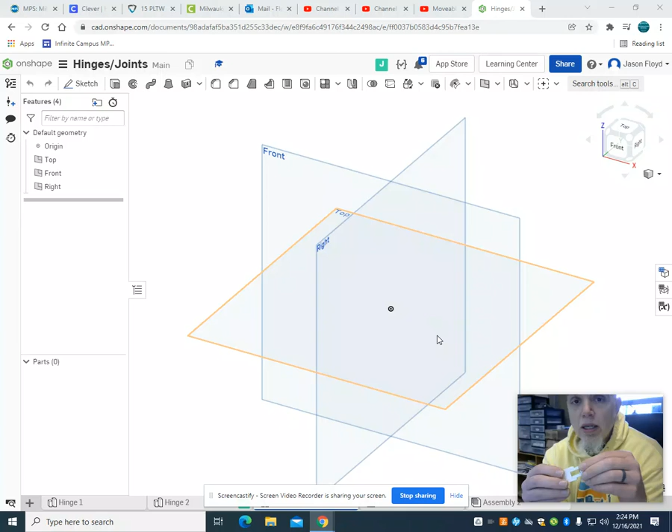In this video, I'm going to show you how to make the second type of hinge. It's a little bit more open, and instead of a bar going across, we have nubs on each side, and we can see how it works right here. Just another option as we're making our movable figure.

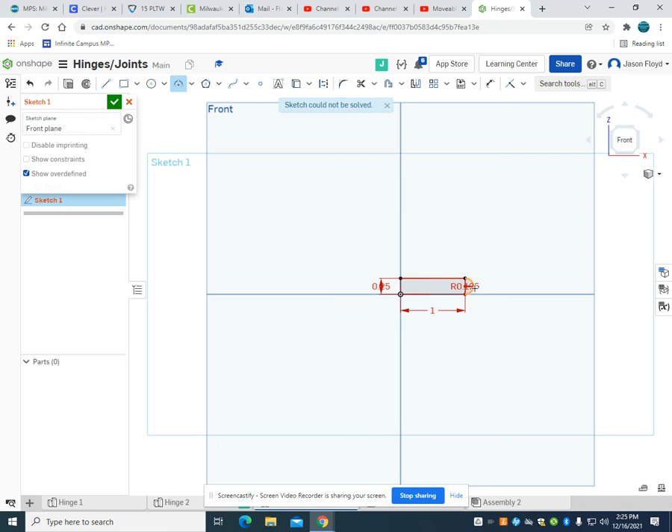We're going to create this same one like we did last time. I'm going to place a sketch along the front here, orientate myself, grab the rectangle tool, and draw a 1 inch by 0.25 inch rectangle. I'm going to grab my arc tool on the end and do a 0.125 inch arc, then extrude this 1 inch.

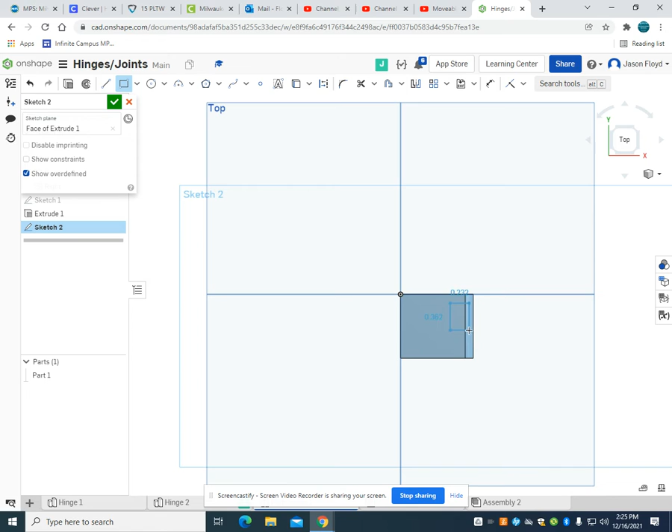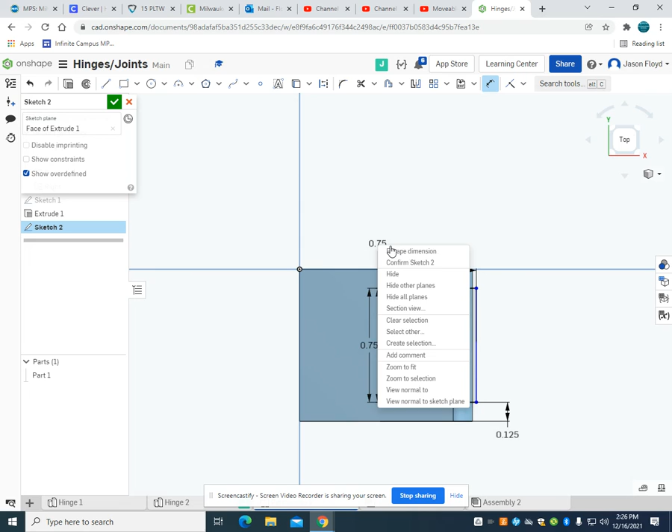Next, I'm going to place a sketch along the top here and orientate myself to the top. I'm going to use my rectangle tool and make that 0.4 by 0.75. I'm going to dimension this from the end here, 0.125, and then dimension it. Let me escape that, and let's redimension that here.

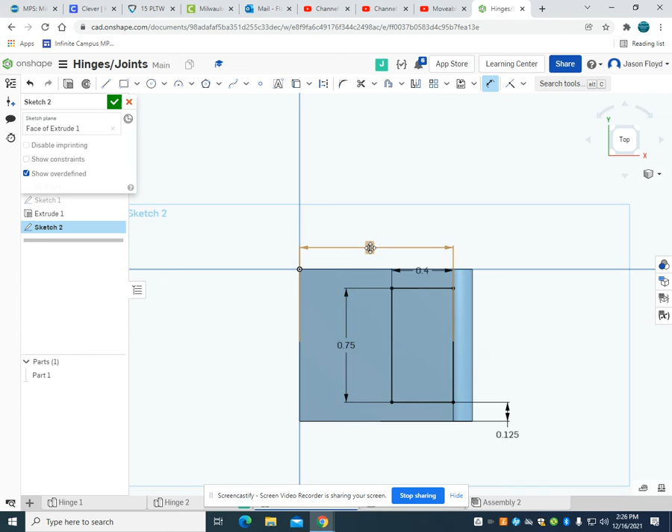Let's do the quick math on that. If that's 1 inch, I think it should be 1 inch. I don't know what I was thinking. No, I lied, it should be 1.125. There we go. I'm going to do an extrusion as a removal.

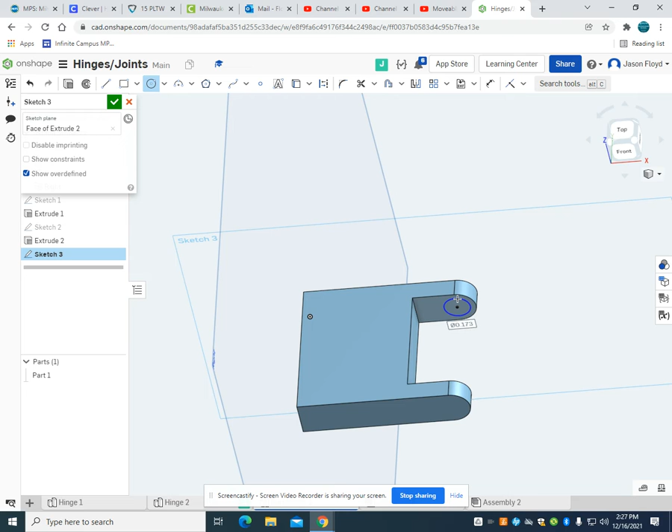Now the next thing I'm going to do, which is different, I'm not going to create that bar that goes across. I'm now going to create a sketch on this side. I'm going to place that hole here again at that center point, and make that hole 0.175. I'm going to come around to close that sketch out.

I'm going to lay a sketch down on the other side. I'm going to do that same hole in that spot at 0.175. Now I'm going to extrude both of those holes.

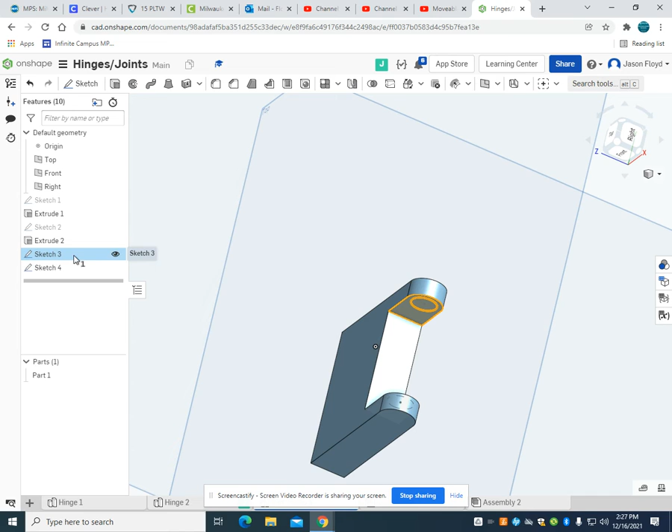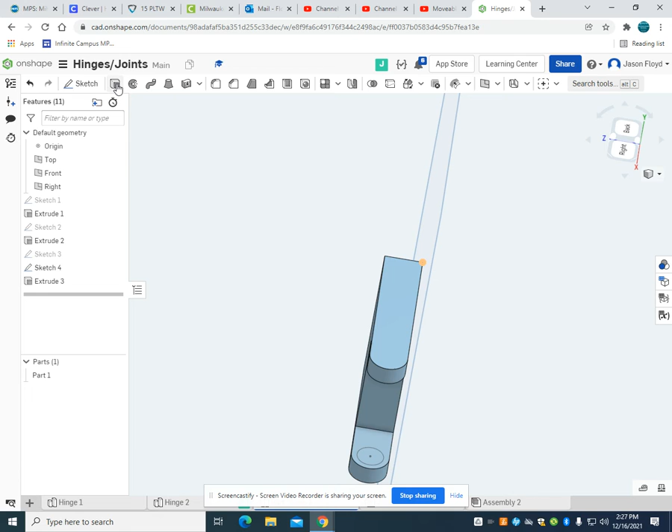Let's close this out. Let's go to sketch 3 and 4, highlight both. I'm going to extrude both of those as a removal. I'll probably have to do it separately - I don't think I can do that at once. So I'm going to extrude that as a removal at 0.1. I'm going to flip back around and do this here as a removal at 0.1.

So that's the first piece of my hinge that's done here. The next thing I'm going to do is lay a sketch down on that top, and do my rectangle again on this.

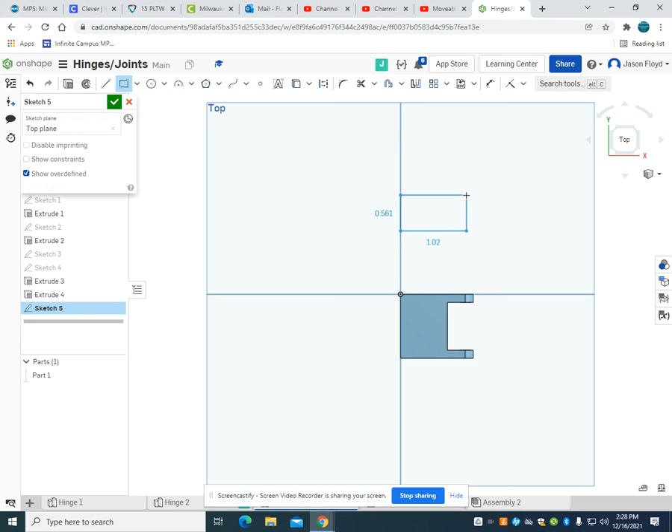I'm going to make my rectangle on this 1.02 inches by 0.561 inches, again, so that fits in there. Again, you might want to adjust your tolerances depending how you're going to 3D print this. The goal would be to 3D print in one piece. I'm going to extrude this 0.25 inches.

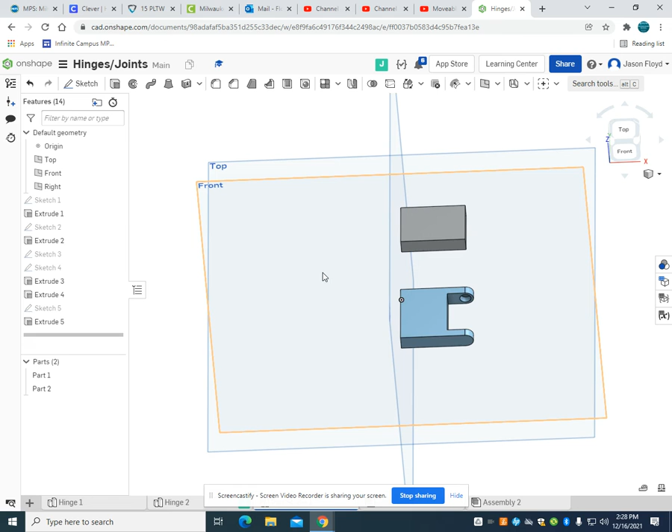After my extrusion, I'm now going to do my nubs on this. I'm going to come to the side of this and place my circle here. I'm going to make that circle 0.125, and dimension it so it's in my center at 0.125. I'm also going to dimension it so it's to the side at 0.117. The reason I'm doing that has to do with my 3D printer tolerances.

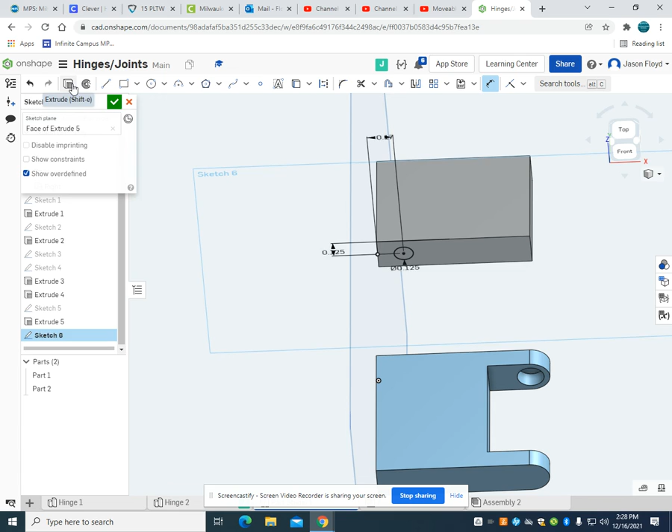So you might have to play around with that to get the measurement that you want. I'm going to do an extrusion on that one, and I'm going to do that extrusion as 0.102. Again, that has to do with the tolerances.

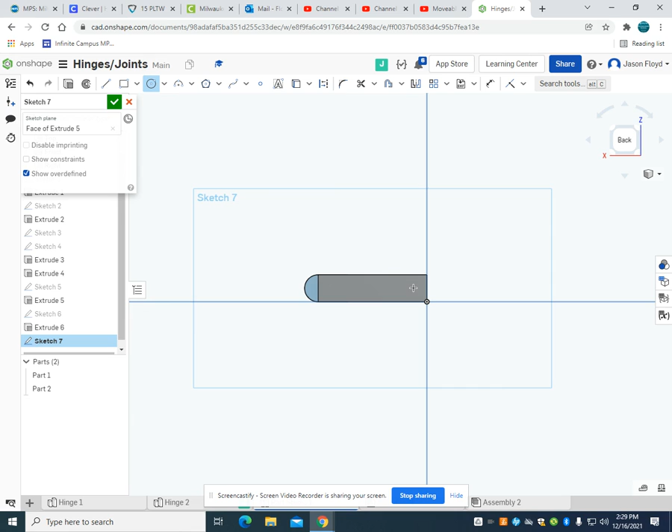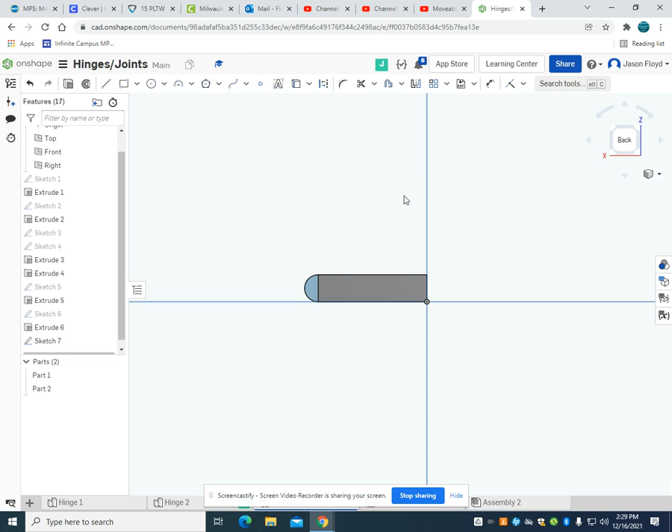So now I'm going to come over to an assembly file. I'm going to do a new assembly down here, and insert both of those parts.